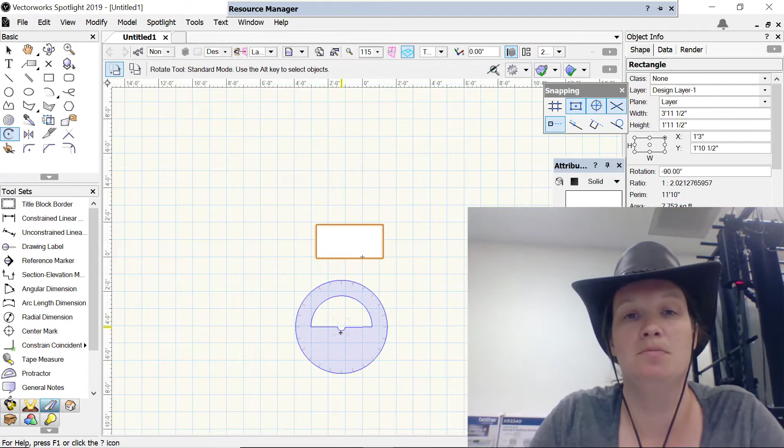So then I'll have you zoom in and draw a front view. There's a drawer in this desk that you don't need to do, I just need to see a front view of the desk. So you're going to know that it's the same width as the top of the desk.

So I just started drawing here and I'll move it down in a second. I'm going to know that it's 3 foot 11 and a half, same as the top. And then I'm going to use the Y value and make a guess about the thickness of it. It looks like it's maybe about an inch thick, so minus 1 inch.

Now I can move that. Let's move it like 3 feet below. Okay, so that would be for the front view. That's the top of the table.

Now I know I have a framing piece that's sitting under that tabletop. You see what it's doing in the pictures? The picture online is a little better than the one on the printout because it's all kind of dark in the printout. If you go online, you'll see there's like a frame, almost like a platform frame, sort of sitting inside of that edge.

We can use math to determine how much difference there is between the overall height and the knee space height. The overall height is 30 inches, the knee space is 25.75 inches, which means you have a difference of 4 1/4 inches, and we took an inch out for the top, so that leaves 3 1/4 inches. So anything from like 3 1/2, which would be an easy number since a 1x4 would be 3 1/2 inches, makes sense for that height.

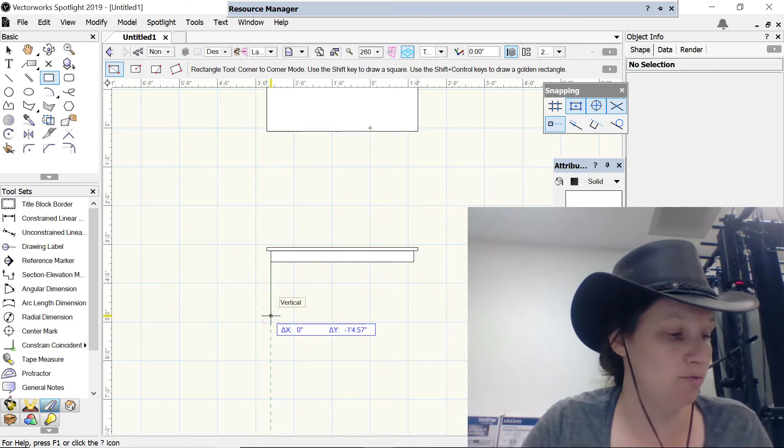Then you'll use what you know about lumber, so if you used 1x to build that, how thick would the 1x be? Right, 3/4 of an inch. So we'll come over here, we'll draw the vertical, which we know because we know the knee space measurement is 25 1/2 inches or 25 3/4 inches. Let's say 25 1/2 inches.

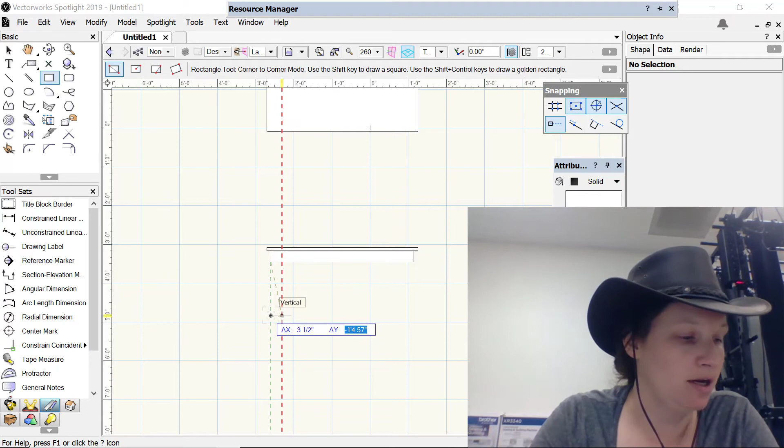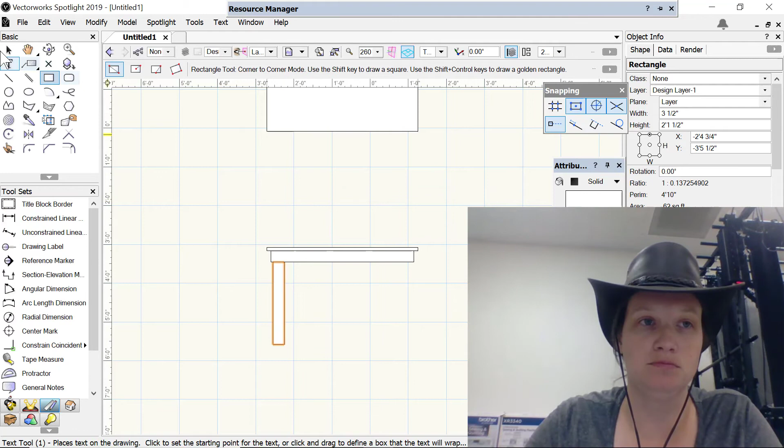So let's make that maybe 4 inches or maybe 3 1/2 inches, so it matches. It's up to you. And then we know it's about 20 minus, because I'm going down from the point, minus 25.5. Okay, so that gets me that leg.

I can use my mirror tool, get my other leg, and then the only other thing that I'd see from the front view is this framing piece that's on the back. You see that? It looks like it's maybe 1 inch thick and about 2 inches wide. So I would just draw that to match this inside width.

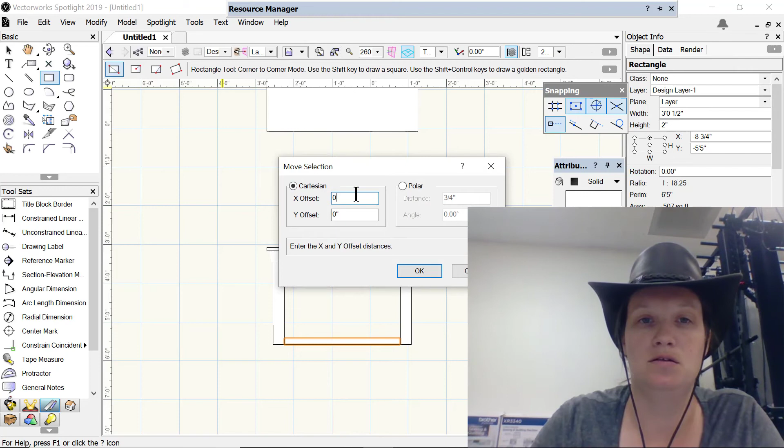You see how I'm using my smart points as guides? Let's make it maybe 2 inches and then move it up, Control M. I don't know, 8 inches. Okay, so that would be now a front view.

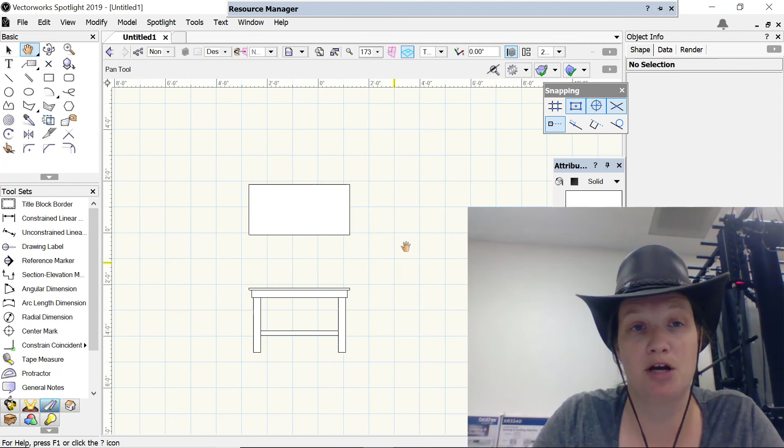You get the idea, you see about the side view? This should take you not very long to complete. Once you do, we can start talking about the next phase of this project, which will be to take it from 2D into 3D. So if you finish drafting this in 2D, then we'll move into 3D in the next video.

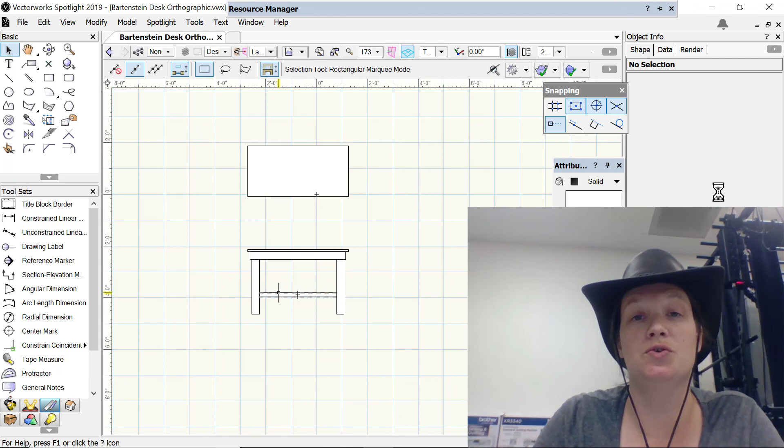I'm going to save this with our same naming convention that we've been using, Bartenstein Desk Orthographic. You'll want to do the same thing you've done before and export it the same way we did for everything else, and label the views on the drawing label. You'll label it as top, front, and side view, and then I'll show you how to do all of that in 3D. Awesome, see you soon.